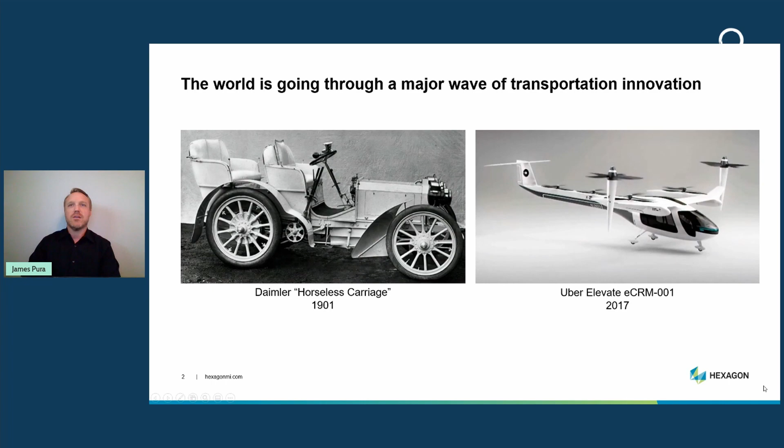And I see this urban air mobility, and sometimes electric urban air mobility innovation, as really akin to when we switched from horses to horseless carriages, right? We didn't even call them automobiles at the time, we called them horseless carriages. And this picture actually came from the Uber Elevate conference in 2017, and I stole the picture from them. I hope they don't mind, but it was a great mindset to really set the stage for how we at Hexagon see this wave of transportation.

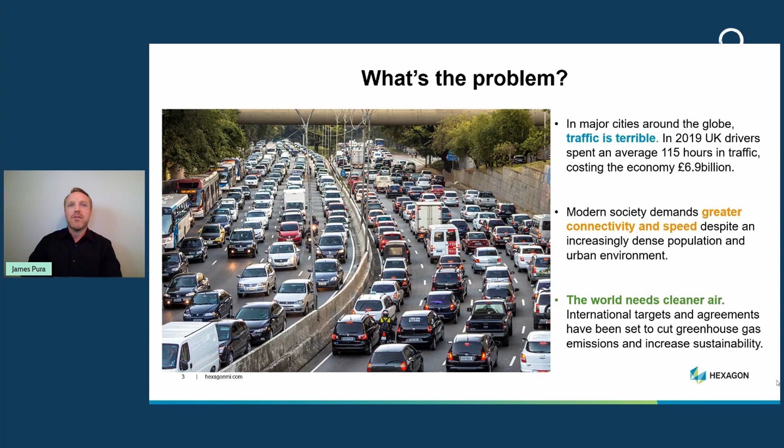Now, what's the problem that we're solving here? I know this has been talked about a lot with different speakers over the day, but really what we're talking about is: doesn't matter what language you speak or what country you live in, traffic is terrible in the major cities, and not only that, but the world needs cleaner air. So if we get out of the cars and onto UAVs or UAMs going from one side of the city to the other, then we might have something going on here.

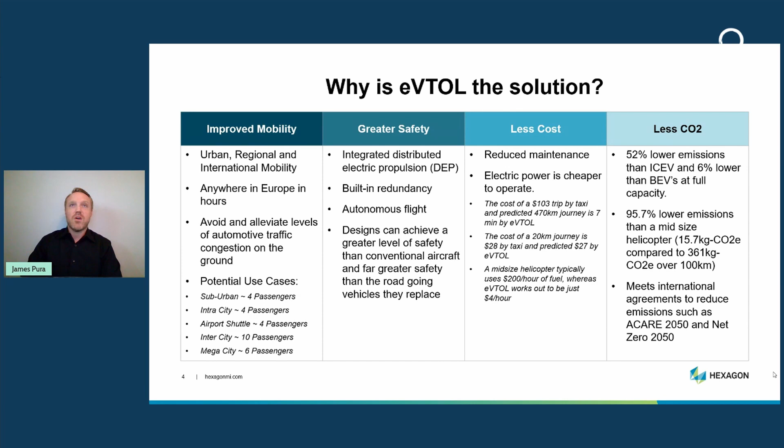And why is it the solution? Why is it not just an industry trend or some sort of gimmick? Why is this here to stay? What we're really talking about is an accumulation of a bunch of different technologies that are really hitting home for a lot of the public here. Sure, you can get from point A to point B quicker, but you're also talking about bettering the planet in terms of less CO2 emissions, improved mobility. You're going over the traffic, which is just wonderful. Greater safety, less cost. All of these things can kind of accumulate in the eVTOL industry.

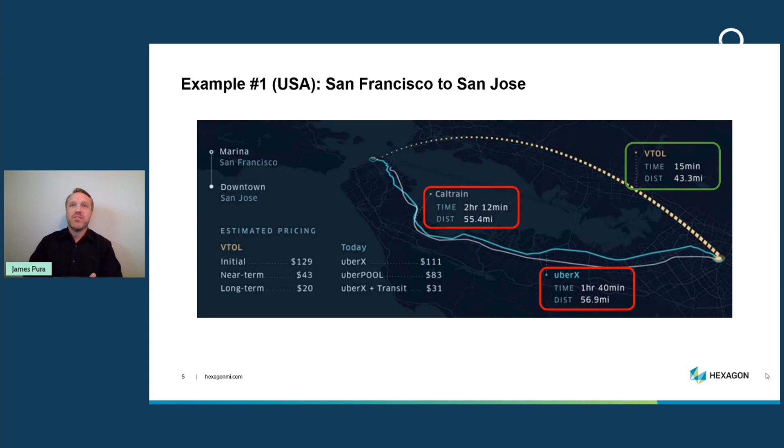So the example I like to talk about, especially when we're talking with our industry customers in the aerospace industry, is something that hits close to home every single time I go to San Francisco or San Jose. There is always a customer on the complete opposite side of the bay that I need to go visit, and the only ways I have right now are either I rent a car, or I hop in the back of an Uber, or I take a train, right? There's three options, and all three really take at least an hour and a half to two hours to go there. God forbid there's a car crash or something like that. It's really something that the VTOL industry - I wish it was here immediately, because I would use it right off the bat.

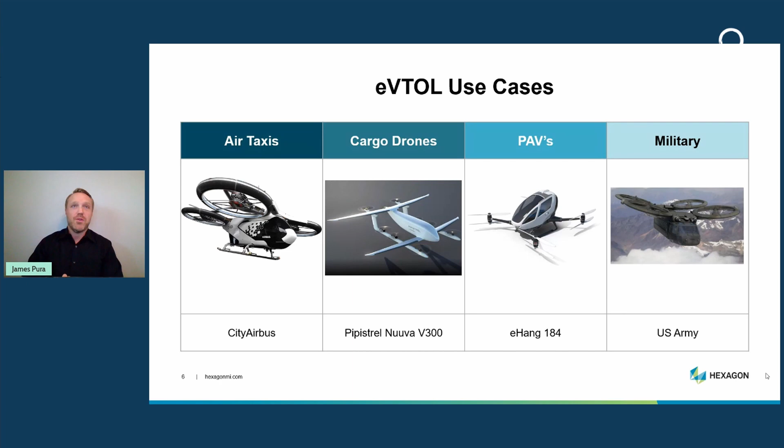Now, urban air mobility for civilian use case is only one of four major use cases that we're seeing worldwide amongst our customer base at Hexagon here. Sure, we're talking about air taxis, but we're also talking about things like cargo drones, personal AVs, and then also the military aspect, which the military has always played a role in tackling cutting edge technology and really proving out the concept, and then the commercial industry comes in a little bit later. And so we're seeing a lot of this happening on all four prongs of this, and they're all in need of engineering simulation. So if we were to just look at the commercial air taxi side, a lot of our existing customers that we're very proud to call our customers are in this space and are some of the leaders in this space.

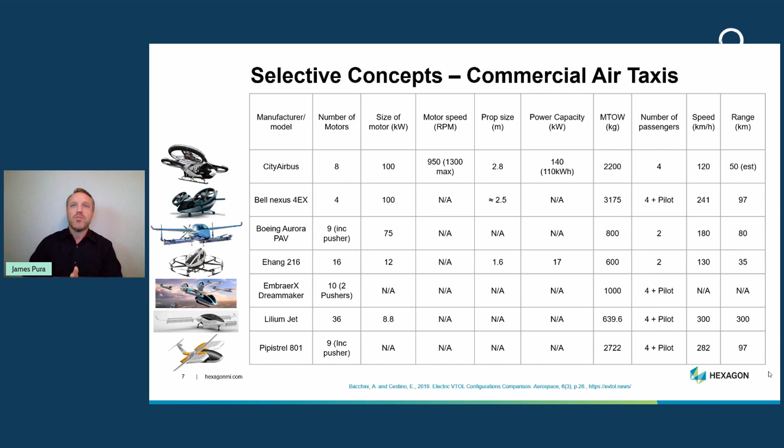This is kind of an eye chart, so don't focus on the numbers, focus on the pictures on the left-hand side. That's my favorite, because a lot of these companies are starting with completely clean sheet designs. They're brand new fly-by-wire systems, never been tested before - tilt rotor aircraft, who knows how many rotors. The Lilium has like 20, 30, 40 different motors and blades on that vehicle. It's really cool to see completely different clean sheet designs.

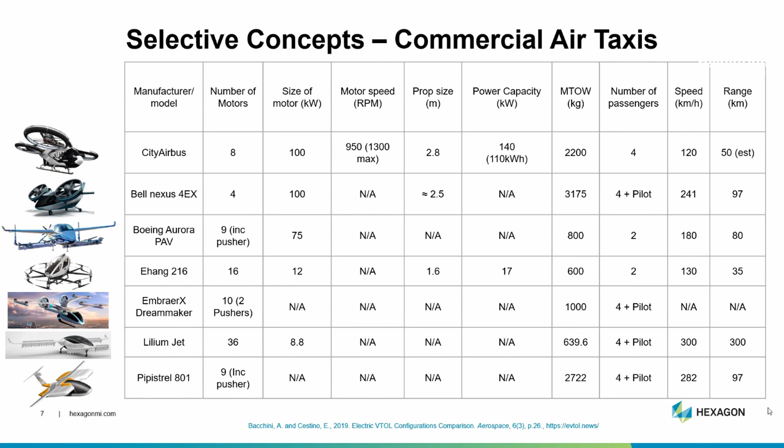Whereas if you look at a commercial jet airliner these days, it doesn't matter what company - Embraer, Boeing, Airbus - they all kind of look the same, just different sizes. So we're really in that cutting edge time of the industry, where no design is a bad one right now.

And we're seeing this all over the world - not just in English-speaking countries, not just in rich cities, it's all over the world. We're seeing, at least from MSC Software or Hexagon's side, lots of companies springing up in areas that have difficult traffic situations, difficult infrastructure, and need for cleaner air and quicker transportation options.

So what are the challenges? Let's say you are either a startup, or maybe an OEM, maybe somewhere in the middle - maybe a small to medium business, and you are seeing the challenges of developing and certifying a new vehicle. What are those? Well, the challenges for eVTOL can be three different prongs that we can help with.

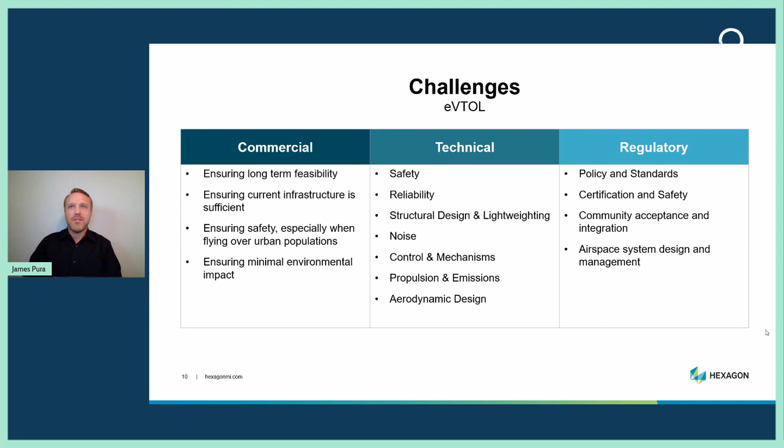Sure, what we're known for is really the engineering technical aspect - things like proving safety and certification, reliability, lightweighting, structural, making sure it's quieter, making sure the controls and mechanisms, all that stuff. But engineering is increasingly being used on the commercial side as well as the regulatory side. And all three of these are needed - it's an intricate dance between all three, really needed in order to, like your previous speaker said, convince the public that this is safe and reliable, and nobody's going to die on these things.

So from the technical side, what are we looking at here? From the technical side, us at Hexagon and MSC Software, we're really known for this left-hand column - this is our oldest business line. MSC Nastran, we helped develop it back in the 60s when we were sending astronauts to the moon.

But we have been in so many more facets of the technical engineering realm now, and pretty much every single one of these is needed by a new eVTOL team before they certify their vehicle and before they prove to the EASA or the FAA that they actually have a safe vehicle that the public can fly on.

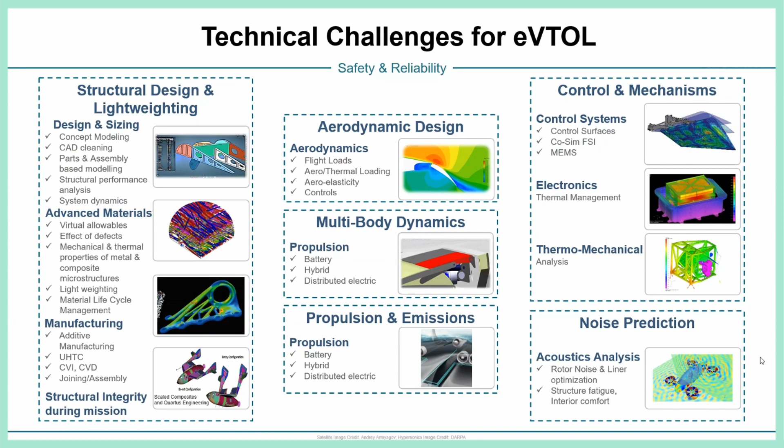So I like this slide because it talks about all of the technical challenges that engineers around the world, no matter what language they're speaking, if they're in the eVTOL industry, there's a really good chance that they're running into at least 2 or 3 of these issues right now, and it's keeping them up at night.

So now that we understand the pain points from the engineering side of the house, what are the solutions? What's that product that you're hawking, James? Well, it's not just product - it's an industry partnership. We are more than just a software vendor - we are an engineering extension to your team.

So we have been involved in a lot of aircraft firsts over the past 50 years, and this is just yet another aircraft first that we are very proud to be a part of. Things like commercial jet aircraft - the first time airplanes went from commercial propellers to commercial jets, everybody was scratching their heads going, how do we do this? Well, before we build an entire airplane and then crash it, let's simulate it using engineering first to make sure we have a good design, and then once we hit the manufacturing floor, that we have a higher chance of success.

The first heavy lift twin rotor helicopter - is this thing even going to fly because it has to carry so much cargo? Well, I don't know. Simulate it. Let's find out.

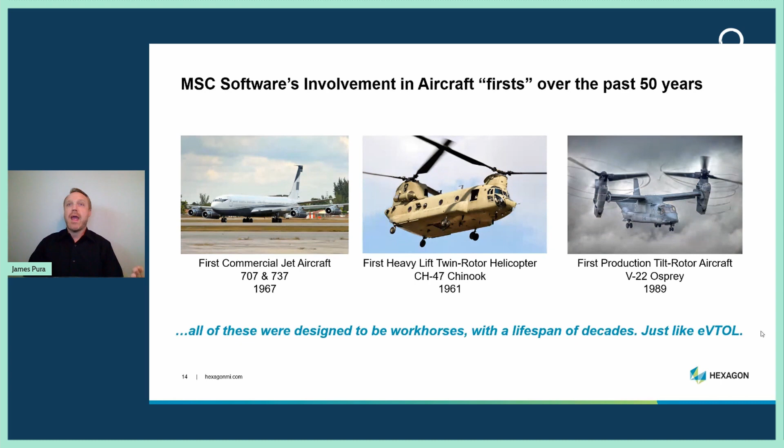And then over on the right, the first time we actually tilt rotor on the V-22, right? How are we even going to tilt a rotor when we have so much cargo sitting in the bay of that thing? Is this thing just going to fall out of the sky? Well, I don't know.

Let's simulate it and let's make sure that it works before we go to the manufacturing floor. And the biggest takeaway from here is this bottom sentence here: all of these 3 designs were designed to not just be demonstrators, they were designed to be workhorses, right?

They're not show ponies, they're workhorses with a lifespan of decades. Every single part of all three of these vehicles is designed to fail at a certain point. So they have been designed and analyzed so that when it fails, we catch it before it fails and then replace the part so that these aircraft last 20, 30 years.

And the same thing can be said for the eVTOL industry. This is nothing new. Sure, these designs look new. Sure, the engineering concepts, like multiple rotors and tilt versus fixed rotor, all this kind of stuff - sure, these are novel designs and new aircraft, but the engineering fundamentals have not changed.

And at the end of the day, if you want to find a crack when it's millimeters wide and you want to simulate it so that you know exactly where that crack is going to show up so that you can replace the part first, come to us. We got your back. Okay.

Now, we are more than just structural simulation. I mentioned before, like if you want to do a full computational fluid dynamics analysis and you want to figure out whether fixed rotor or tilt rotor is good for you and you want to simulate both just as a design trade-off study, cool, we got you covered.

If you want to see how loud your propellers are actually going to be, and your rotors are going to cause whether your passengers are going to need headsets or whether they can just walk in and talk on their cell phone inside of the cabin, we've got a full suite of acoustic solutions for you, right? If you want to see what it's like to manufacture something out of composite versus aluminum, we got your back on that too.

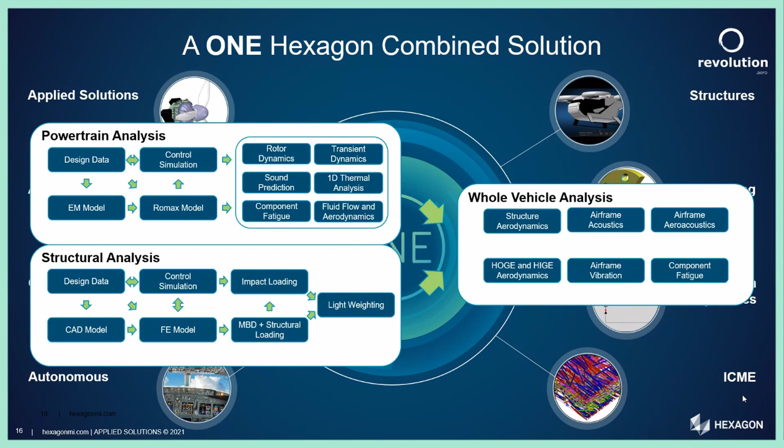Now, in terms of the main three needs that everybody that's building a vehicle, whether you're Boeing, Airbus, Bell, or whether you're a small startup, you're dealing with things like powertrain, structural, and whole vehicle analysis. And all three of these are changing with every new design. And you need to be iterative and you need to be quick. And we know what you need and we got your back.

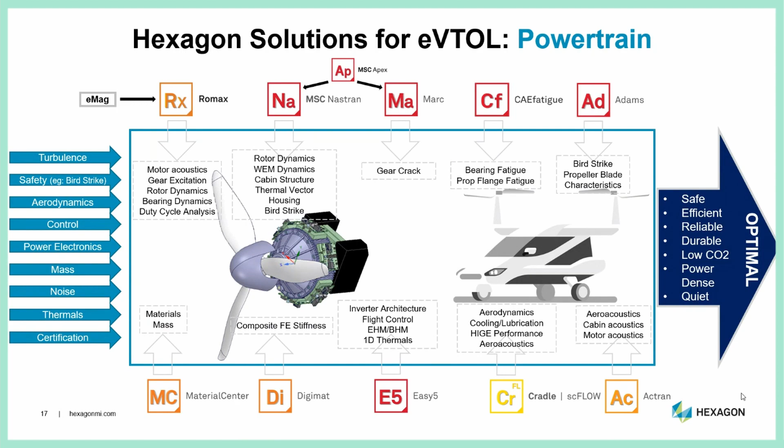So again, this is just a deeper dive into the powertrain aspect. We've got a lot of different software solutions that talk about - you get a lot of heating, moving parts that cause friction, all that stuff. We can design around that.

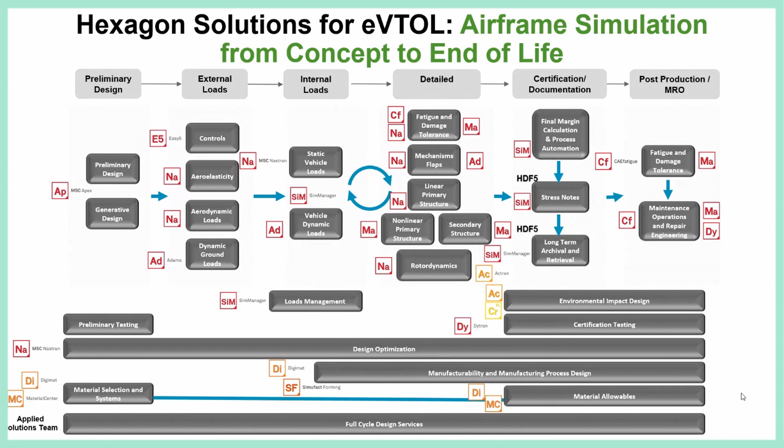The airframe simulation from concept all the way to end of life, we can simulate that and make sure that you know exactly what's going to happen 20, 30 years down the road, and everywhere in between, what happens to your aircraft airframe. Now, in terms of reliability, right?

Things like durability cycles and fatigue life cycles, we got your back on that. We can tell you which part on your aircraft is likely to fail first or second or third or fourth so that, again, you know whether you can design a maintenance schedule around it, right?

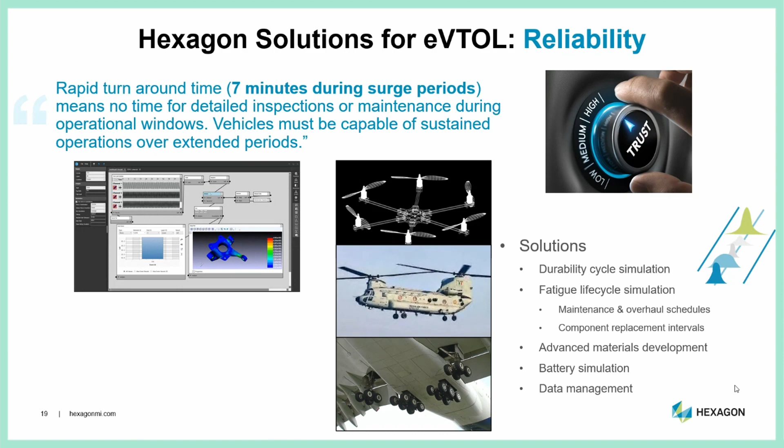And this is what our major decade-long customers are using our solutions for today. And we want to make sure that eVTOL solution providers today that are building these new aircraft know that we're around to help you guys out with that.

Lightweighting, right? For every ounce that you take out of the airframe is another ounce that you can add to your passenger quota, right? And that's important because passengers are equal money in terms of the commercial aspect of this. And we want to make sure that you have the lightest and yet strongest airframe that you can possibly have.

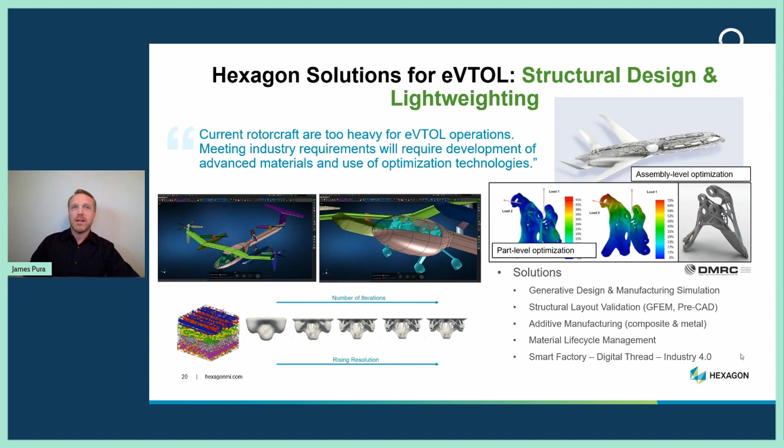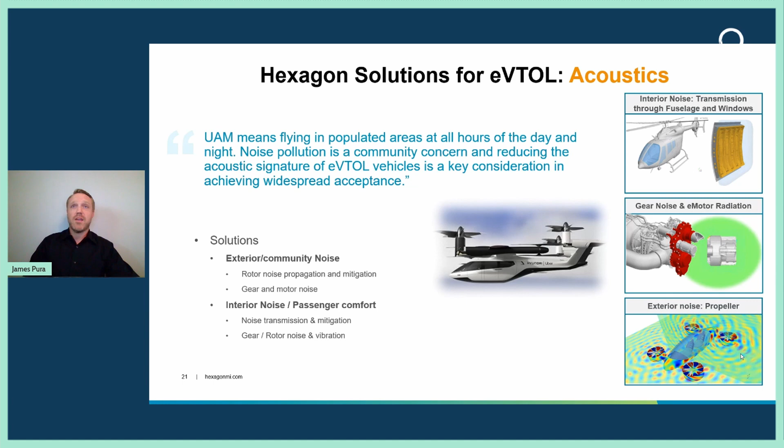We've got a lot of structural design and lightweighting solutions for you. Acoustics, as I mentioned before, the two biggest sources of noise here are your rotors, as well as the noise inside the cabin. You've got noise from external sources, and you want to make sure that things like encroachment or local aircraft or airport ordinances are followed. But you also want to make sure that someone can hop on one of these eVTOL aircraft and still hear themselves think. It's not so loud that they have to wear a headset. We can cover both aspects, external and interior. Things like tilt rotors and wing flaps, we've been doing for decades. We've got you covered in terms of that.

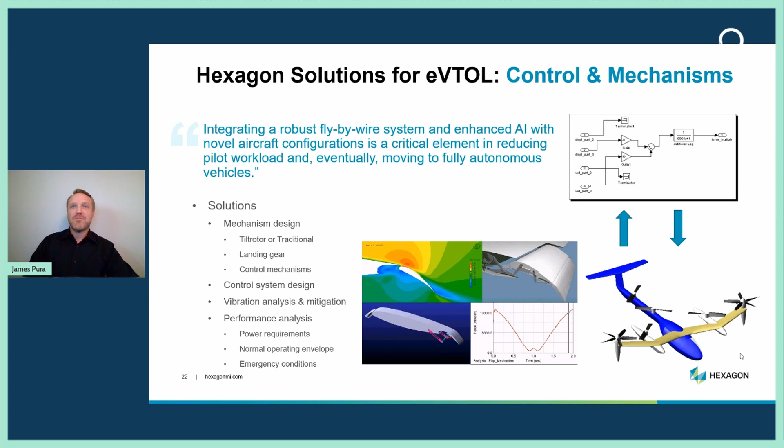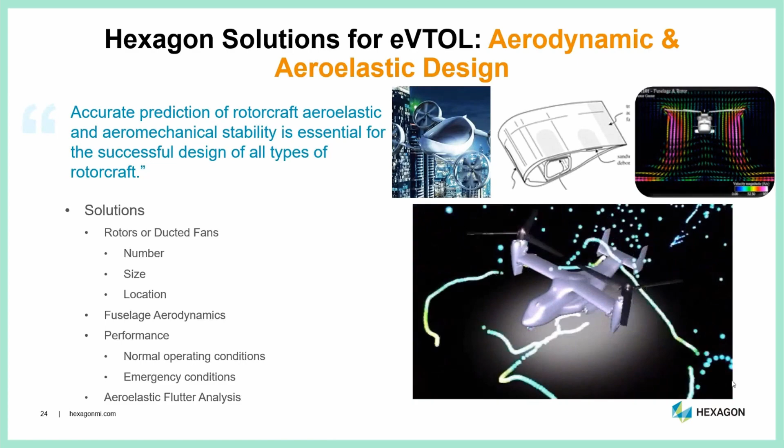Here's some animations of things you can do using our software solutions. Now, a lot of this seems very sophisticated, and your brain might be thinking, is it going to be too expensive? The answer is no. You don't have to be a Boeing or an Airbus in order to afford our software solutions. We've got you covered when it comes to that. We've got good pricing situations where you can grow along with your company, making sure you're not betting the farm just on software engineering tools, as some other software providers have done.

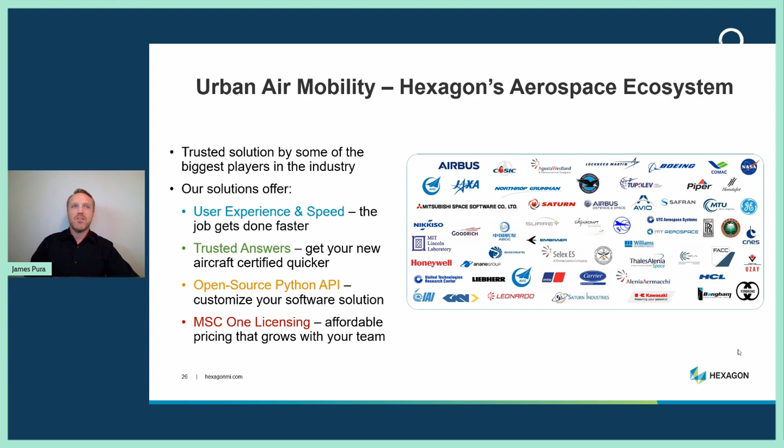Really, your main takeaway here is that you're coming to an engineering simulation house, Hexagon, that all of these household names have relied on for decades. So if you're designing something new and don't really know what the industry standard is or what the best-in-class offering is, come to us, we can help you out. But we also have the ability to customize our solutions directly to your aircraft. You want to leverage scripting in order to automate some stuff and maybe do some really cool artificial intelligence or Python API type work. We've got your back, we've done it before, and we'll do it again. We would be happy to help this industry do the exact same thing.

Absolutely, good question. So we have situations where startups come to us and say, look, we need to certify this aircraft, we have one product line, and we need to go to market with this one product line. So we need to be as cost conscious as possible until we get to that stage, can you help us out? And yes, absolutely, we do. We don't charge you the same prices as if you have 20 or 30 engineers, as opposed to if you only have one or two engineers, because obviously you don't need the same engineering capability. But if you're a Boeing or an Embraer or an Airbus, with teams of engineers at multiple locations around the world and across the country, you obviously need a different solution than if you're a startup working with one or two engineers. So definitely contact us, we'd love to talk to you about that. You're going to be pleasantly surprised with our solutions.

And the other issue which has come up all throughout today is noise, for community acceptance. Anyone who's been in a helicopter, I'm guessing you've been in a lot because you've got some pretty cool helicopter clients. Are you going to be able to talk to us about noise?